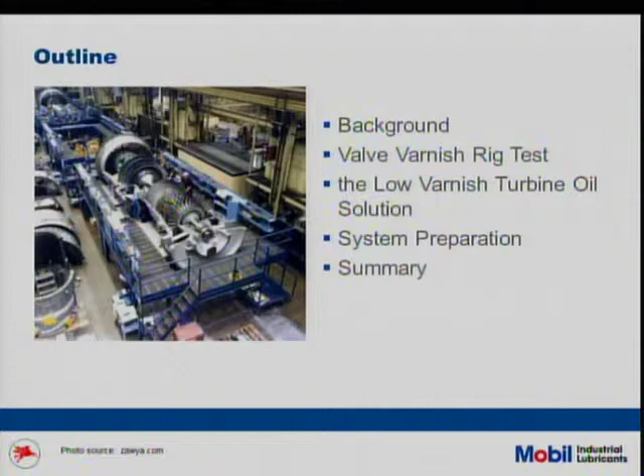By way of background, ExxonMobil and other major oil companies have been in the turbine oil business for years and years, especially back when the majority of power production was steam turbines from coal, so our primary focus was in steam turbine oil.

As the gas turbine population has grown over the years, there's been much more emphasis on producing a gas turbine oil. Part of that is we brought oils to market only to find customers weren't satisfied with the performance. So we did a survey, and it was an interesting time for us, where we had our marketers call customers like yourselves and talk to plant managers, maintenance managers, talk to anybody at a particular site that would have knowledge of that facility.

And then the particular issues that facility was facing. So when we did that survey, we represented 192 gas turbine plants, 626 gas turbines. These were all EAs and FAs. So we looked at the lion's share of the power generation market.

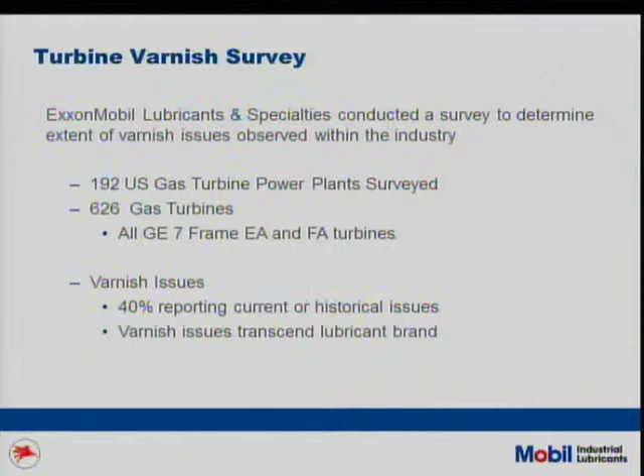So when we look at trends and different things going on in the industry, a couple things to point out. One is customers are saying, hey, I need trouble-free operation from overhaul to overhaul. I can't afford a no start on a Monday morning. I can't afford a utility trip. And the demand penalties, when you can't start that turbine up and you're in a 6-hour delay, that's a major impact on your economics for the day. So that's certainly a number one element for us.

The other thing is, as the dry low NOx burners came online over the past 20 years, what we found is the air-fuel ratio precision had to be a lot tighter than it had been in the past. In the past, you could get away with a little bit of sloppiness on that air-fuel ratio stoichiometry. But now with dry low NOx burners, you have to be right on. And that means my hydraulic servo valves that control air and fuel have to be right on. So if I've got the least amount of sludge or varnish in either the upstream pencil filter or in the servo valve itself, it's going to be a bad thing relative to hitting that air-fuel ratio.

And if I'm off by a little bit, that unit will trip offline, and then we have those issues. We've also seen an increase in cyclical firing. This was written a couple years ago, and a couple years ago, a lot of the plants that had started base-loaded are now cyclical, but now, because of the lower gas prices, a lot of those cyclical plants are becoming more base-loaded.

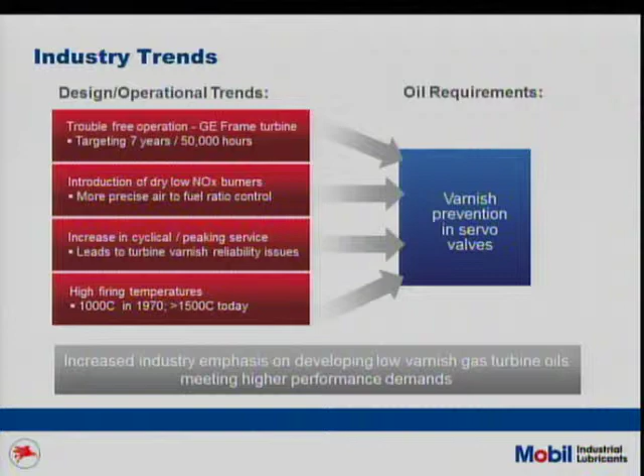So our emphasis to help the industry has been on this varnish issue in these servo valves, and I'll explain in a coming slide. Why is it the servo valves? Why is it not a thrust bearing or something to that extent? So this tries to give that picture here.

What we're looking at is this would be a gas turbine that has got a combined hydraulic and bearing reservoir. This is namely the GE series that use the turbine oil also as the hydraulic oil, and Alstom has that same design where you're going to share that reservoir and ask that turbine oil not only to be a turbine oil and protect the bearings, but also be a hydraulic oil.

So in some respects, it's asking a lot of my poor little turbine oil, but hey, we rise to the occasion, and it's a challenge. And so that gives us an opportunity to kind of work around the designs that are in the market. So that's one type of turbine you'll see out there.

Then you see gas turbines, and maybe it's the Siemens Westinghouse 500 series or the Mitsubishi 500 series. And those will have separate reservoirs. And so the separate hydraulic reservoir allows you to have, maybe you've got a 300-gallon hydraulic reservoir that you're going to change that oil out every 3 years because it's fairly cost effective and it doesn't take a lot of effort to make that change.

Whereas this, the gas turbine, you want that to run 7, 8 years, go overhaul to overhaul. So to make that change is a lot more problematic, expensive than to make a change in the turbine that has the separate reservoirs. And basically in these turbines that have the separate reservoirs, we do a lot of turbine inspections, and at overhaul time, we're getting our heads into those bearing cavities and seeing nice clean bearing surfaces, no issue.

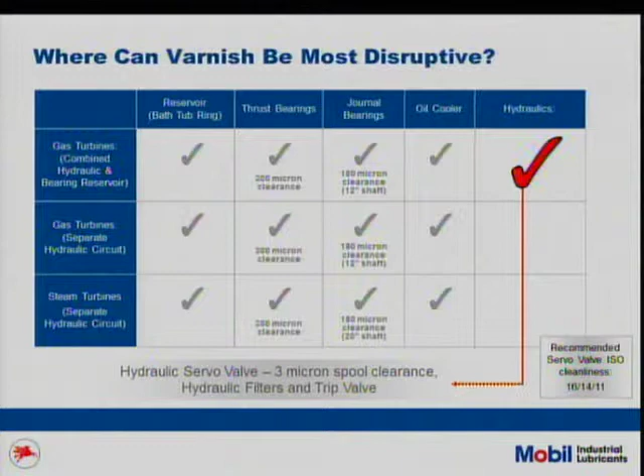This is some pictorial representation of where that issue is, and those of you that operate this type of equipment, you've seen this stuff torn down before, but the big thing is here, when we talked about the air-fuel ratio, here's my air side, that's my jack shaft linkage that goes up here that controls my air into the turbine. And what this jack shaft does is goes up, and it only moves about 1.5 inches or so, but it's enough to turn this ring gear, and that ring gear turns the damper. So if I don't get the right movement, I'm not going to get the right air-fuel ratio.

And that's where my servo valve lives down there that's fed by the hydraulic system. This is my gas valve here. And so this is where we're going to control the gas side of things. And again, if I'm offset by a little bit in here, that's enough to trip my unit offline.

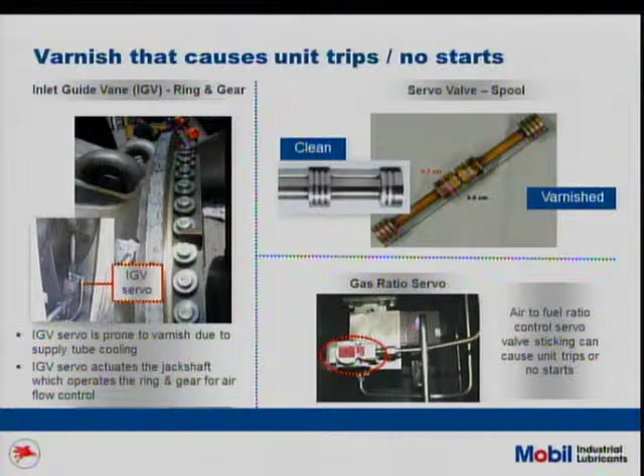And then here's just what that spool valve looks like. And this one is nicely varnished up by us. And here's a clean one. And that level of varnish looks minute, I mean, visually you can see, but that varnish is sticky. And that stickiness gets in that servo valve and doesn't allow the valve to fully travel. So then my air-fuel ratio is off and the unit shuts down and you've got demand penalties you're paying and people are upset.

Because of these issues, the customer base has been very innovative on a number of different workarounds. Okay, we've got the oil in the turbine and I'm having these problems. What can I do to improve my operation? So these are what they call mitigating strategies. And it is pretty neat stuff that unfortunately the customer has to devise largely on their own, largely going to user groups, largely hearsay, I heard this worked for them and that type of thing. So I'll just give you a quick flash of some of the things that are going on.

One is the advent of some new oil analysis technology. These technologies were around for years, but didn't really have much traction. People weren't using them much because there wasn't a whole lot of benefit to them. Now, because of this varnish issue and a lot more study work, had there not been a varnish issue, we wouldn't be talking about RULER or MPC. Because there is, all of a sudden it's become a pretty nice tool to help you, the customer, understand, hey, am I going to have a problem here in the near future?

So the reason I bring this up is the world of oil analysis has improved itself over the past 15 years, including some of the work we do with RULER, and RULER just looks at the antioxidant reserve. MPC is membrane patch colorimetry, looks at the color of the deposits in the oil, and ultracentrifuge spins the oil at a high RPM and then looks at deposit formation. So there are some unique tests in the market to help you, the customer, understand, hey, am I going to have a problem next year.

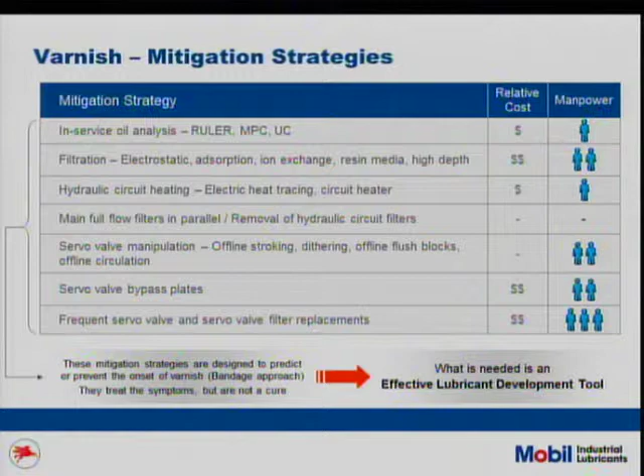We feel that none of these are really needed. What we need is just a better oil. And that's what got us back to our rig testing. So what we did back in our Paulsboro facility is we had to get a better understanding of, hey, what's going on in the real world? What does a turbine look like? Where are the issues happening?

So this is just a representation of actually one of our own plants' DCS screens, where we're showing, this is on a Frame 7 FA, and we're ramping up. So our red line is the valve command for the fuel valve, our green line is the valve position, and then the blue line is the power. And what we're looking at is anytime there's an offset, that's a potential for that unit to trip offline.

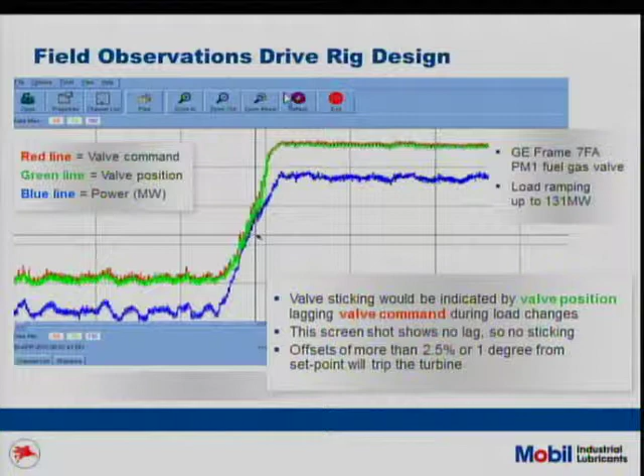There's a lot of great oil analysis stuff going on out there. I get customers that say, I can tell when I'm starting to have a varnish issue when I look at my screen and I can see that there's an offset larger than I would expect. That tells them that they're starting to get stick-slip friction. So anyway, this helped us to understand, when we build our rig test, we knew we wanted to have a valve in there because that duplicates what you're seeing, but we wanted to also get a sense of how much offset we would accept. And so this helped us in that conversation.

Also, we call it an open your equipment and look kind of philosophy. We've got a lot of good oil analysis data out there, a lot of things you can see, but the most important thing is to look at the equipment. And so this is our last chance filters, and here's a nice clean one, and here's one that's fouled. It's readily apparent, and so our lube engineers and sales engineers work with the customer base when the unit's down to pull a last chance filter, do a visual inspection and compare it to the oil analysis they're seeing to help understand where you are in the lifespan of this oil.

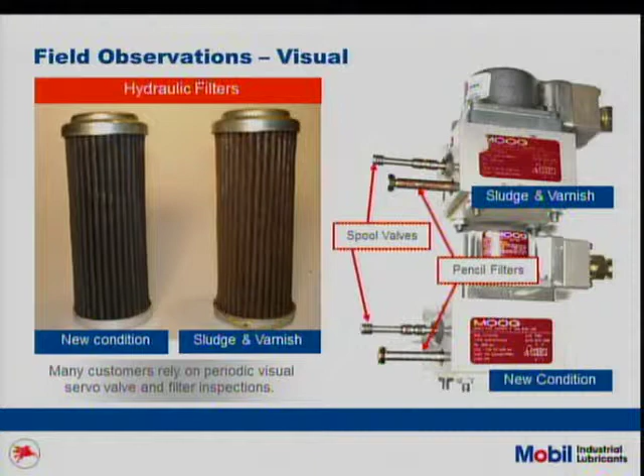So it's good to get your eyes on the equipment, and then also, if you can, pull the servo valve. And if you pull the servo valve, take a look at that spool piece, take a look at that pencil filter. That gives you a clear indication of, am I expecting trouble here in my near future or not? So we use the combination of what we're seeing on the screens and visual inspections. And that helped us build our rig. And this is kind of a representation of what our rig looks like.

Basically, we can start with the pump. From our pump, we've got a splitter that goes to a climate-controlled chamber where our servo valve is. Again, these rigs are designed to accelerate what you would see in the field. So we don't want to build a rig that lasts 50,000 hours. We want fairly rapid decomposition of the oil to show us how one oil would compare to another. So with this climate-controlled chamber, that's where we put our servo valve in. The oil would flow around that, go through a heat exchanger, through a filter, and back to the reservoir.

And this rig, we've got 6 of them in our Paulsboro facility, probably about the size of this table with the components, and then the climate-controlled chamber. And so we run this cyclically like a lot of the power plants are run. We run it 5 days on, and then on Friday night before the guy goes home, he shuts it down. And when he shuts it down, he looks at that valve stroking to see if there's an issue.

And then Monday morning, he fires it back up, and he looks to see if there's a valve stroke issue on the restart. And that's when we look for that differential that we don't want to see in an oil, and that's how we develop an oil to last as long as we possibly can without generating stick-slip friction in that servo valve.

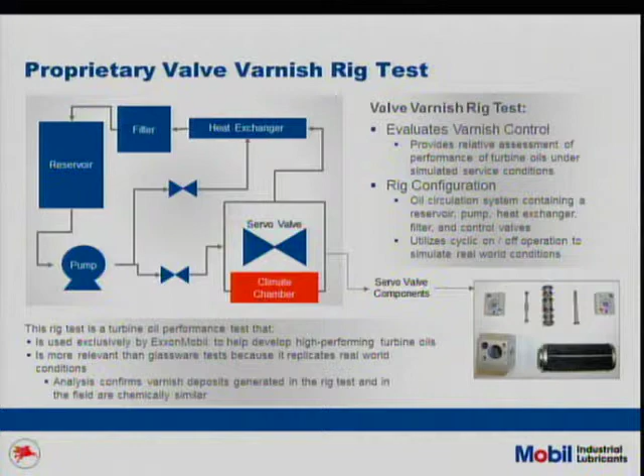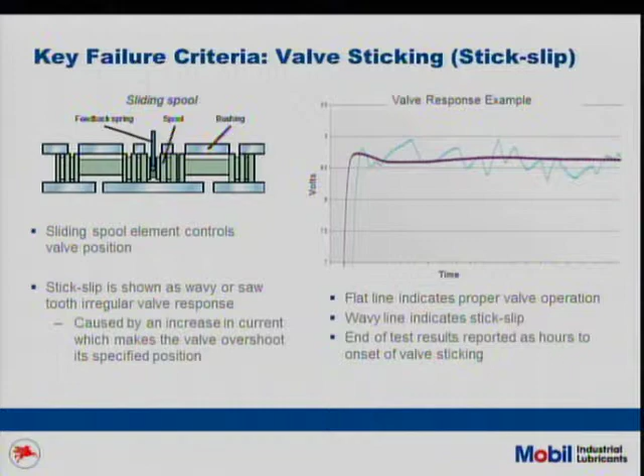And quickly, I've got about 5 minutes left, so I'll chew through this real quick. This is just our servo valve and a representation of stick-slip friction. Basically here, this is what we want to see: the valve coming right to set point and staying, not hunting, not seeking that set point by stick-slip friction. And this is an example of overshoot, then undershoot because of stick-slip friction.

Again, we're not relying 100% on this valve stick. We're also doing visual examination of the equipment here, and then we're also doing oil analysis that might condemn an oil. So we're looking at it in 3 different ways. We're looking at the valve stick, we're looking at oil analysis, and then we're looking at the components.

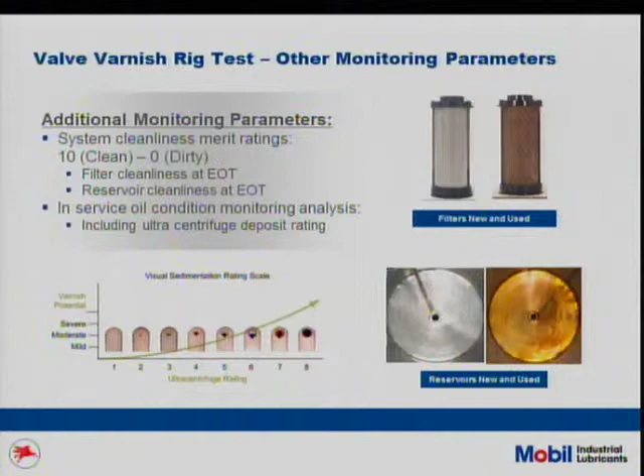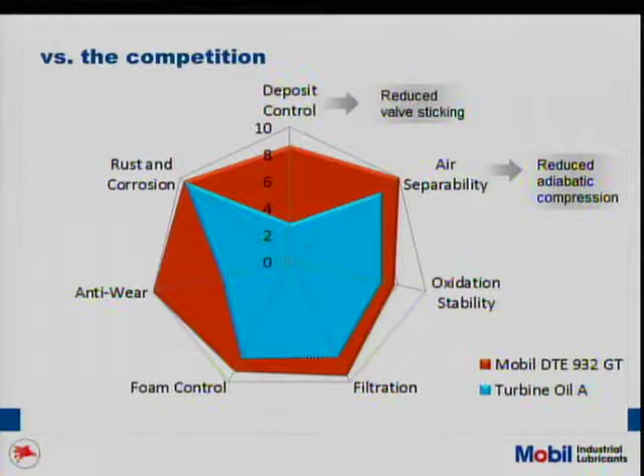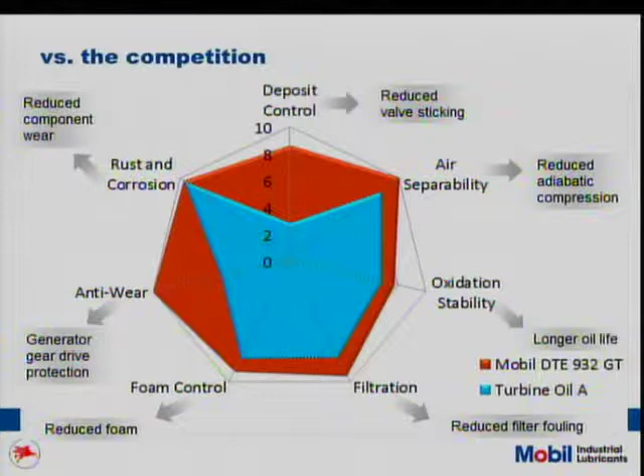So here's the oil that we've worked up, and we call it a balanced formulation. When we bring an oil to market, we need it to do wonderful things in a lot of different categories, not just excel in one aspect. So real quickly, this is like our deposit control, air separability, oxidation stability, filtration, foam, anti-wear, and rust. So you can't just develop an oil for one attribute. You have to take a look at the big picture, and then we use the spider charts to help us keep that focus.

And as you can see, the new oil that we brought to the market has done a lot better than current oils in the market, and even better than what we thought was the best oil in the market at one point in time. So it was a pretty good learning tool for us to see what today's turbine oil market looks like relative to varnish.

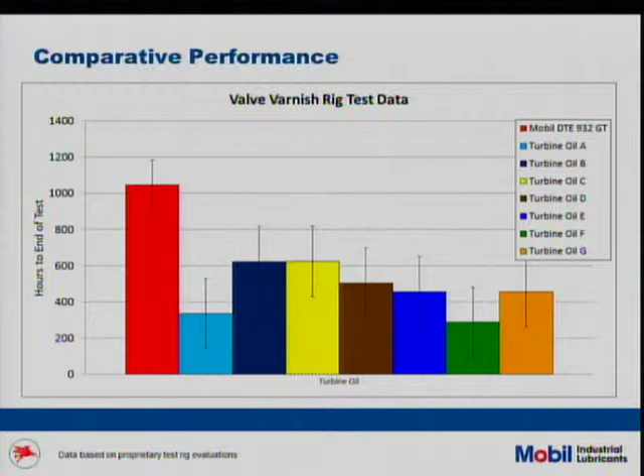So just real quick on system prep. Again, when I started, I talked about how we could have the greatest turbine oil in the world, but if you didn't clean that system prior to it, oftentimes you're going to have failure. And oftentimes I use the term a half-life. If you were getting 7 years on your old oil and you just did a drain and refill, you might only see 3.5 years on that next charge because you left the residual behind. So there's a lot of good guidance documents on how to properly flush that turbine.

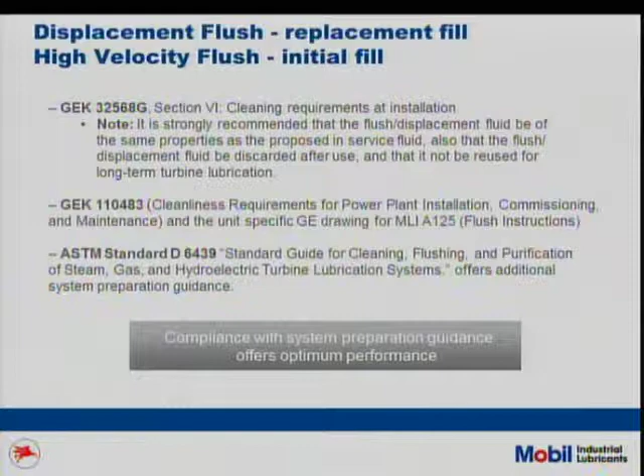So, with a minute to spare, my summary is that we recognize there's an industry issue. We recognize gas turbines' place in power is going to continue to expand and expand, and we just want to be part of that solution.

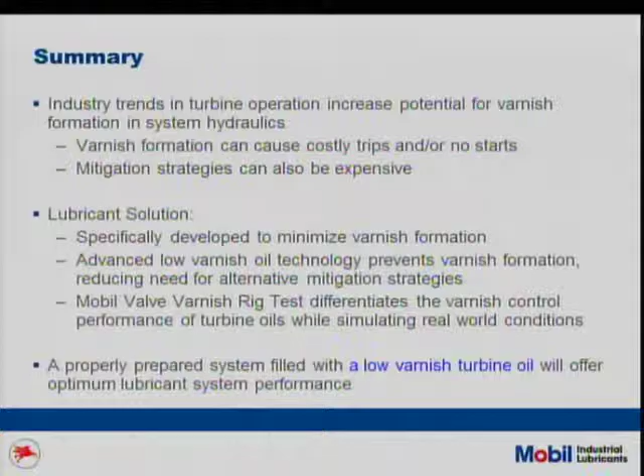Any more questions? And just one more teaser part of this too is we're working with some of the OEMs on higher efficiency oils. So that's some pretty neat stuff that is kind of coming down the road for us.